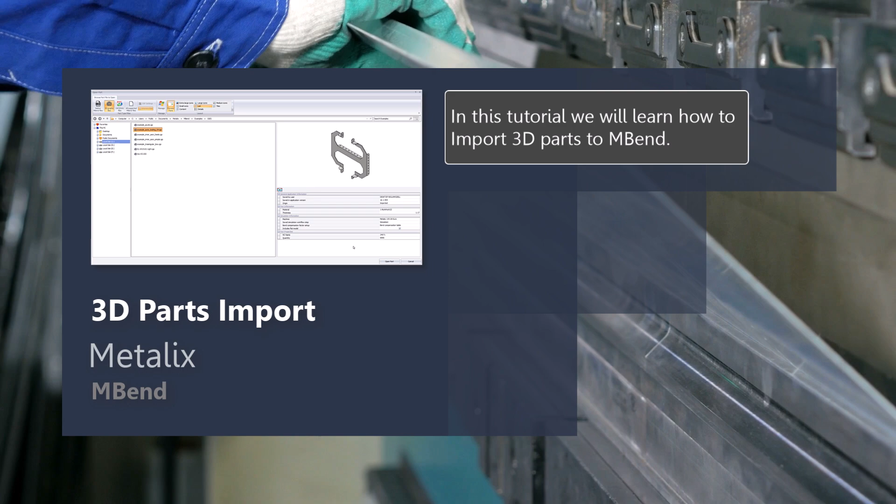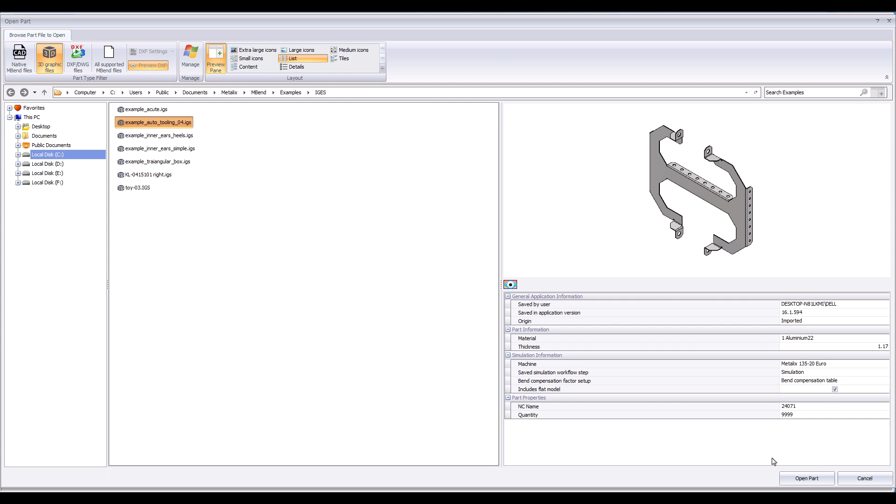In this tutorial, we will learn how to import 3D parts to MBend. After opening the part, the bending information is analyzed so that the part can be unfolded.

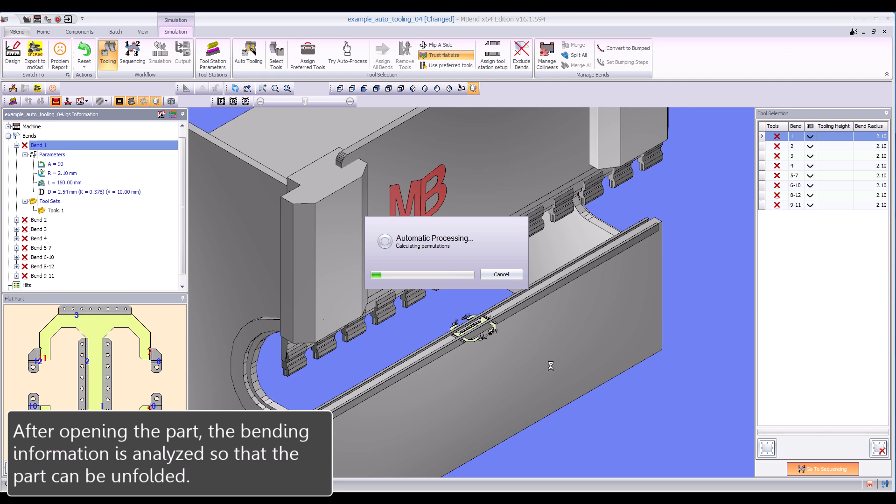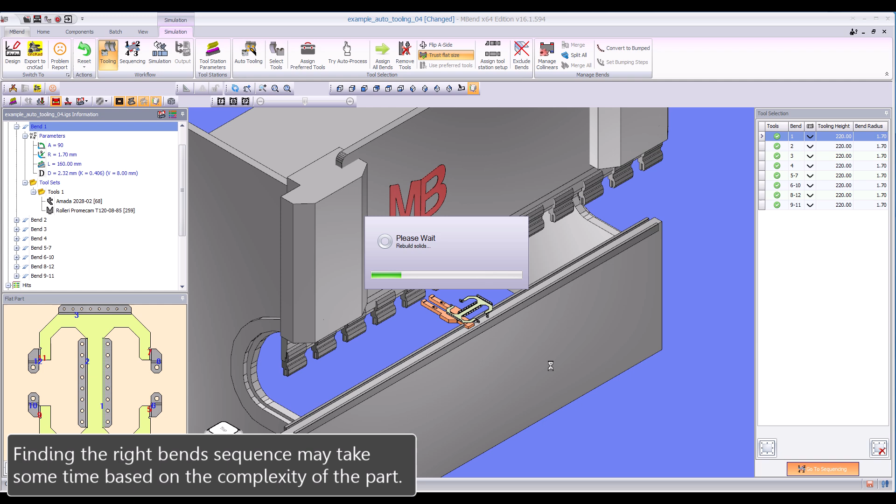When the part is open, the software will automatically select the tools and search for variable bend sequences and tool setups. Finding the right bend sequence may take some time based on the complexity of the part.

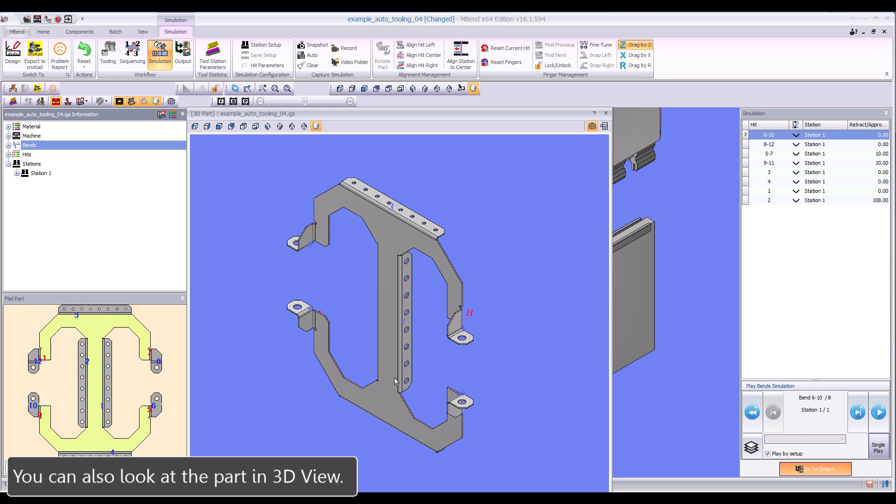You can also look at the part in 3D view. During the calculation of the sequence, MBend takes into account the available punch and die segments and combines them into the optimal setup.

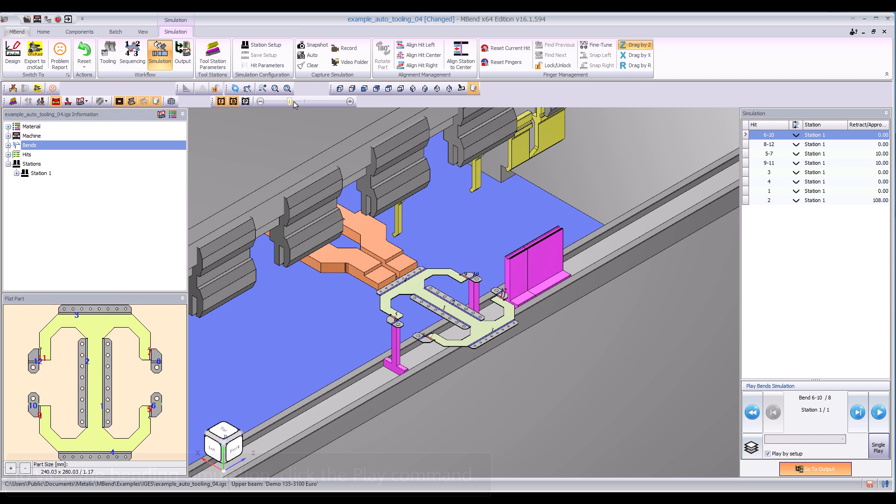To view the bending simulation, click the Play command.

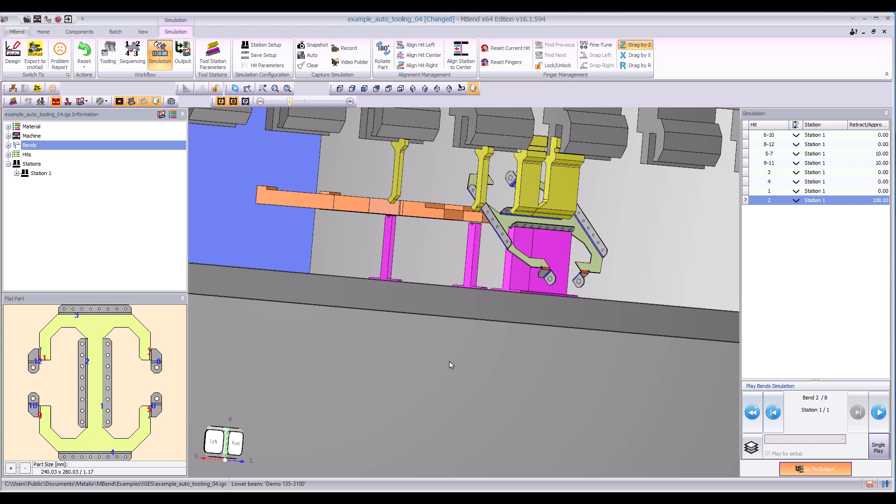The final stage is to generate an NC file and a setup report file for the machine operator.

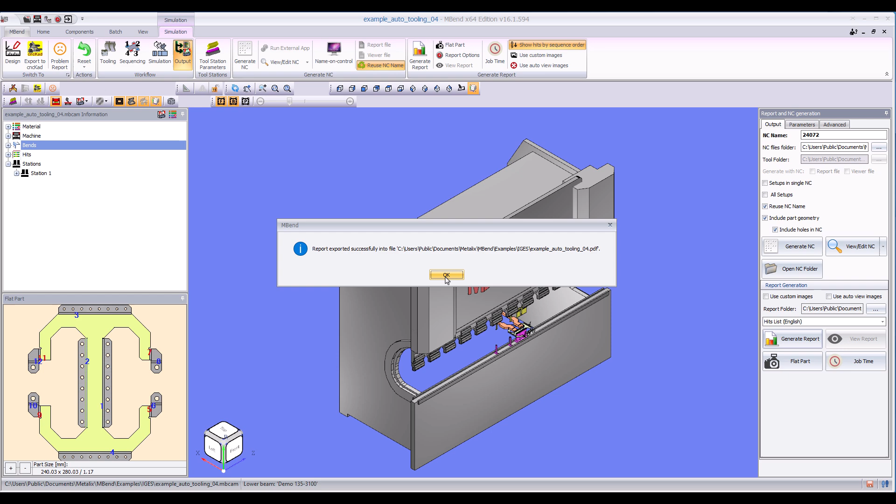The setup report includes all the information the machine operator needs to bend the part, including a flat view with bend sequences, setup information, and graphics showing each bend.